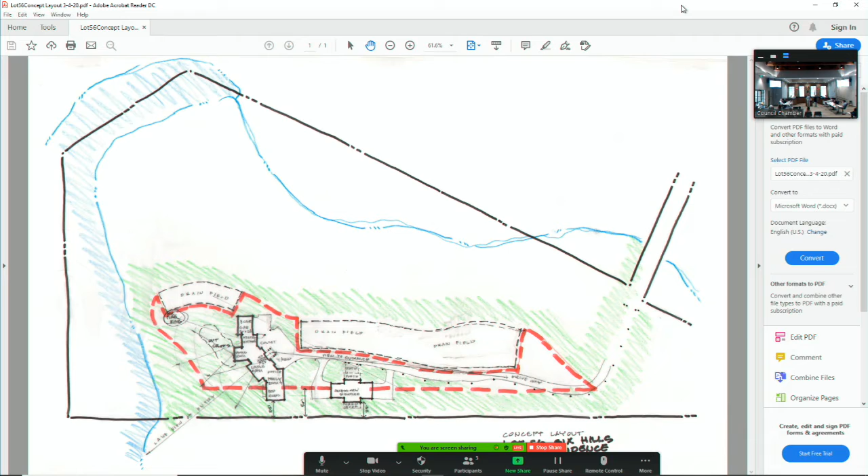Bob's here, and the one thing we discussed yesterday with Mr. Brubaker, my neighbor, there's been a longstanding friendship. We've come to an agreement on the buffer, and we're totally fine moving forward with just the one-sided buffer. But I wanted to show what we were able to show Bob yesterday: by not getting the variance, the house gets moved over into where the septic area is, which moves the septic field up to where the property line is. We'd have to cut into a whole series of trees, and the secondary structure ends up where the driveway is, so we'd be cutting a new driveway, more than likely up towards the property. So I think Bob agrees there's probably more damage to be done if we don't have the variance.

We've come to the agreement that the remaining 25 will be untouched in a perpetual easement. So if for some reason we aren't the owners long term, that's protected for Bob—that 25 will not be built on or touched, and those trees will continue to be maintained as a forest. Just wanted to show that, since we don't have the picture, at least you can see there's a lot of thought put into this. There's actually some photos of the locations.

Those photos in the packet show what it would look like without the setback and with the setback. The little blue line shows where the driveway would be centered, right where the current drive cut is, and right where the secondary structure would be without the variance. That would cause major disruption—additional cutting, additional property impact, and more than likely the septic field would have to be moved into the most dense area of the property.

Mr. Brubaker is here, and he'll have an opportunity to speak and share his concerns as well. That's it for us. Any questions for us? Are there any questions for the applicant?

Where does Mr. Brubaker live? The only really adjacent home nearby is Mr. Brubaker's property. It runs along the rear, backside of the property—Bob's property and ours adjoin at the lake and run across that back. I think it's considered the west side of the property, adjacent to where the west accessory structure is, right on that line. That would be the Brubaker property. One picture, I'm assuming, because his name is up here—yes, that's his lot.

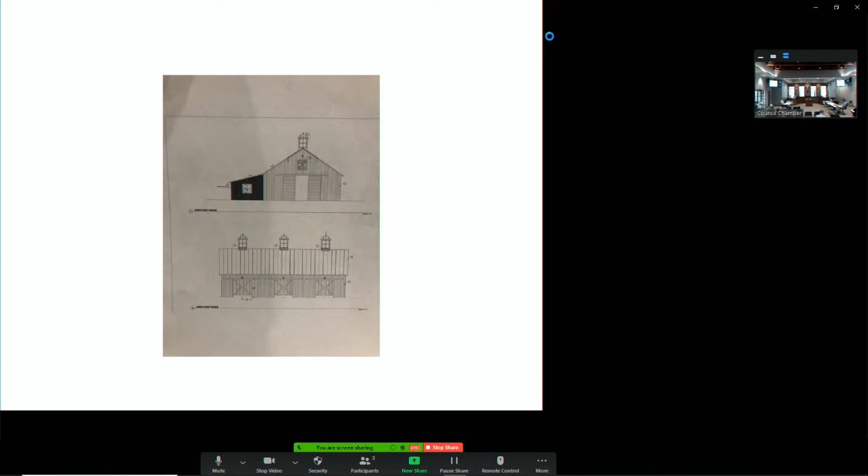I have a couple of questions. I'm not sure, I guess they're showing a proposed house. I just wanted to make sure that the permit was issued for it. I think you said it was, but I just wanted to confirm. For the land disturbance permit, yes, and for the house, yes. I just wanted to make sure that was clear, that there is one.

Because on cases like this, with accessory structures located in the front yards, we wanted to make sure, and the board's always asked that the accessory structure be subordinate to the main structure. So a 7,200 square foot building, it's up to the board to determine if that's subordinate. So that was one of my questions. The building permit for the home equals what square footage? I believe it was roughly around 10,000 square feet. Okay, so this says 11,000. I'm sorry, 11,091 on the site plan. Thank you for clarifying.

Any other comments, Bob? Well, I wasn't sure, maybe during the presentation, the 11,000 — is that like a two-story, so it's really 6,000 and 6,000 footprint? I just don't know because the accessory structure, the board's always said, Bob, make sure that when it comes in to describe it so you'll know whether or not it's subordinate size-wise. Well, I think we could look at the footprint of the home relative to the 7,200 square foot pad and see that the pad is subordinate to the home. Yeah, in footprint. And I'm sure the applicant will clarify.

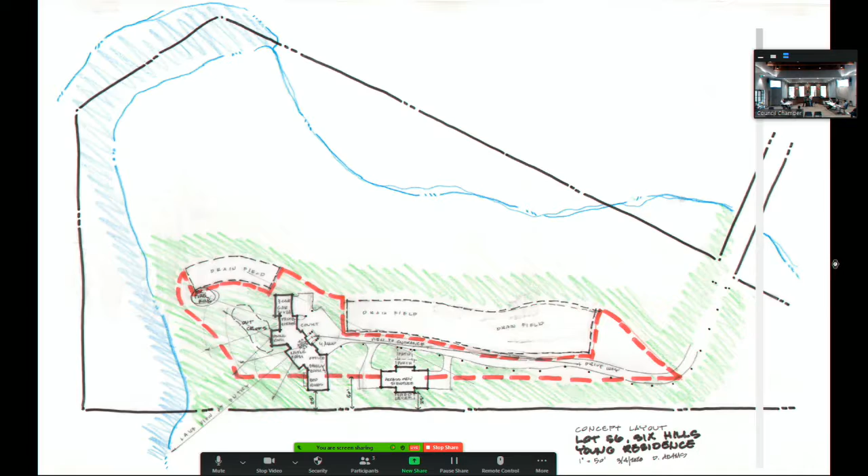So we're incorporating the existing structure. I would like, if possible, to have the original survey showing the original conditions placed on the screen, but it's not loading yet, so I'm okay waiting a minute to get it up there.

I think it's important for people to see this is a 30-plus acre parcel. There was an existing house from 40 years ago with outbuildings, and we went through the application for demolition of the existing house and the old rundown barns. I just wanted to demonstrate that.

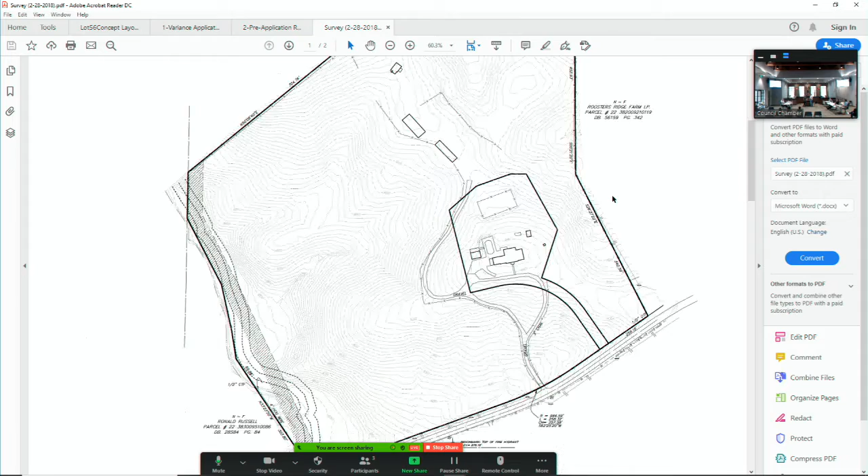Does the overhead projector work? Okay, go to the survey right there. Go up one—maybe it's there. Oh, maybe that's it, thank you. So this was the state of the property when the Young family purchased it. That's 7,200 square feet, and it was formerly a tennis court. So to repurpose that area that's already cleared and graded was the intent.

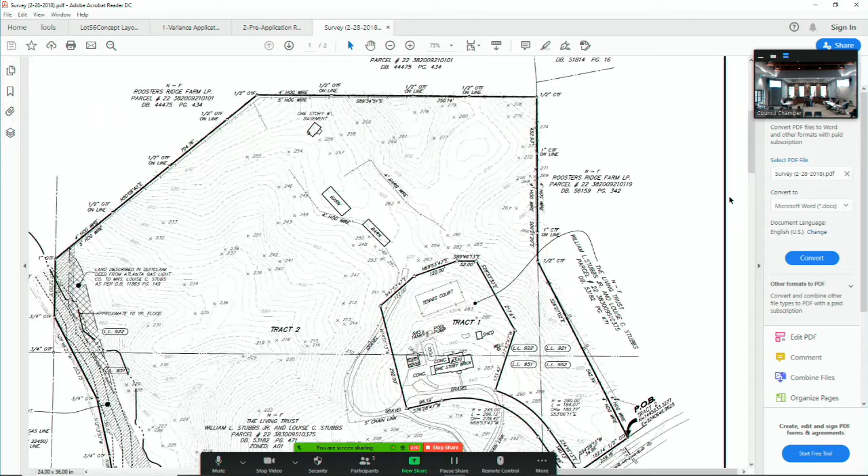If you see where the two old livestock barns are toward the rear of the property, that's roughly where, as we'll see on the site plan, the new residence under construction is located. The building to the west of the one-story brick house is the structure—I think it's misidentified as a guest house. It doesn't have a restroom; it never was a guest house. But anyway, that is the structure we're wanting to keep.

So I think this gives you an idea of the conditions prior to their purchase, and why—the existing driveways, the existing graded areas, the existing tree removal that was there. So if I could get a copy of the site plan.

While he's pulling that up, how many structures have you already demoed with approval on the property? Three or four? Three, yeah. Where was the original house? Ma'am, that was what we just had up on the screen, next to the quote 'guest house.' Do you want us to go back to the survey?

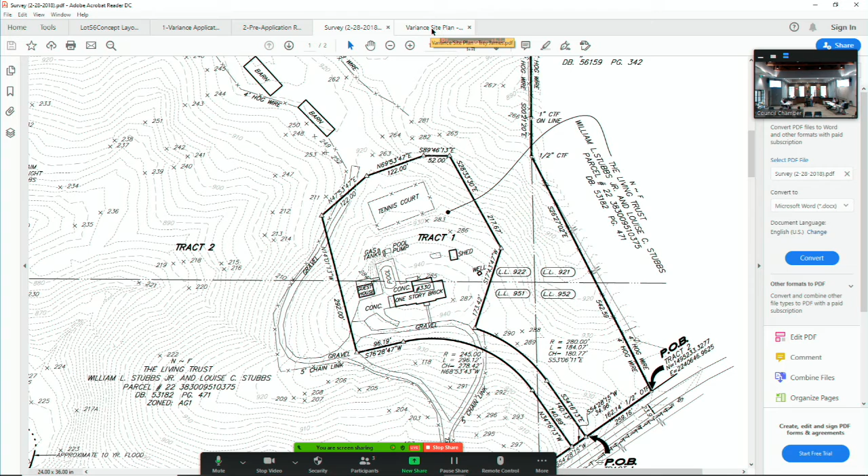Okay, so originally the structure was in the backyard that you now want in the front yard? Well, it was not behind—it was to the side. There it is right there, Ms. Keller. Okay, so the one-story brick building was the primary residence, and over to the west, the rectangle is the structure. So it was technically behind the front building line.

And the tennis court that now is going to be another—yes, there will be the barn, the workshop and the equipment storage. Okay, so if we could have the site plan.

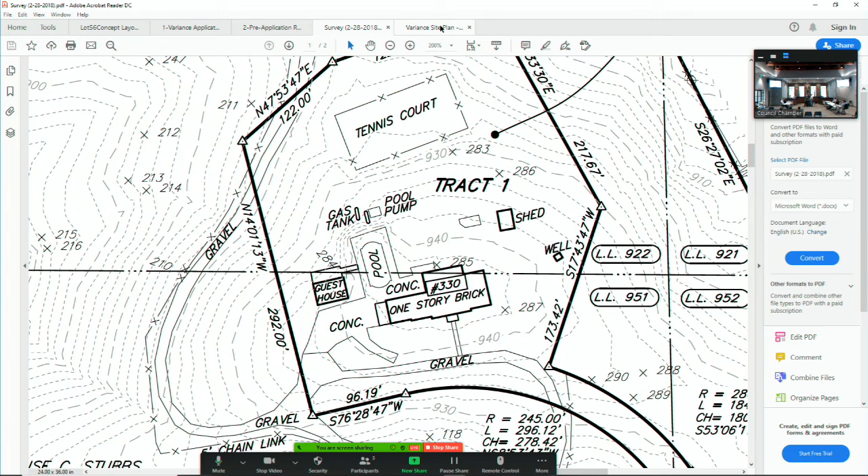So you'll see in the northern quadrant the proposed residence that's now under construction, the existing pad that was formerly a tennis court which will be the site of the proposed building, and then the existing building that's there. And I'd like you to note the distances from Dorris Road and the fact that they're so far away.

What is Exhibit A, which is the former guest house and the tennis court—what is the distance from the road? I'm going to have to guess: that sideline is 542 feet there, so I'd say 450 feet on the proposed barn and 400 on the existing structure. Okay, according to Google Earth it was 500 feet and 600 feet from Dorris Road. Yeah, that's because the road is bowing out if you did a perpendicular distance.

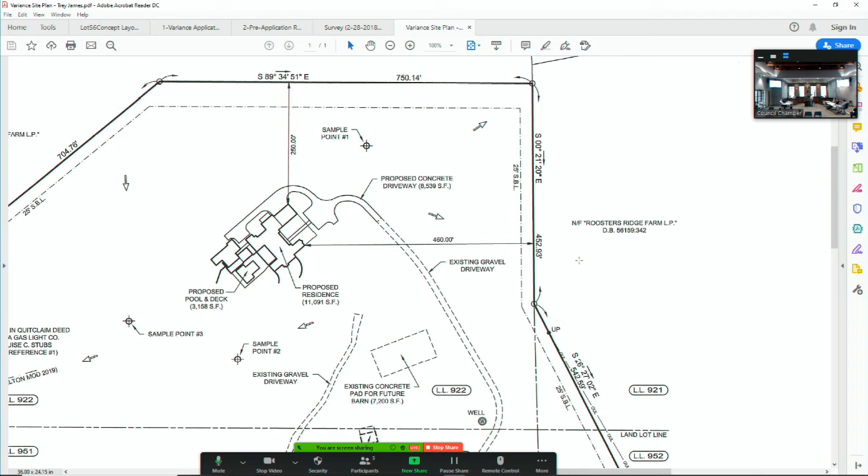And so could we have the pictures, please? Okay, so this is the existing structure. As you know, this was an abandoned residence, so this is the shape it was in. They're proposing to remove the blue awning, repaint, and refurbish it—not remodel, just refurbish. So the blue awning is going. If we could scroll to the next picture—it will be newly painted and refurbished, but not remodeled. Okay, if we could go to the next pictures.

On the top? Well, that's just the Google, but there should be. He's got them there. Yeah.

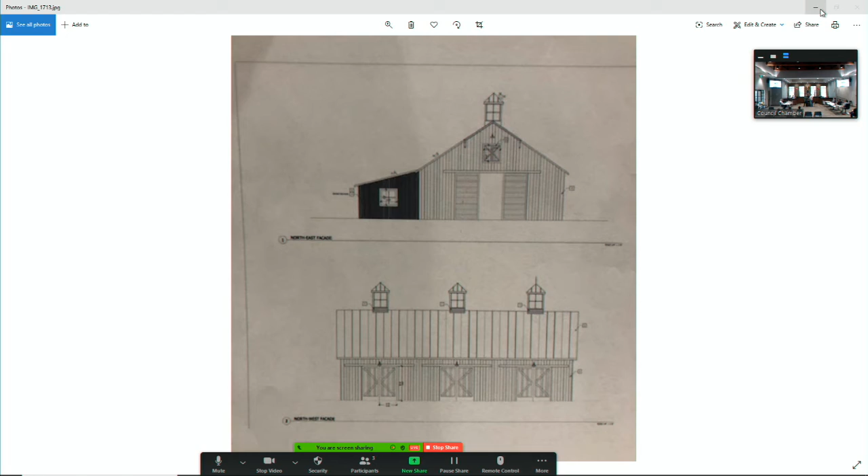So I know I've bounced around a little bit. It's a little new for me tonight, a little different. We would be glad to try to entertain any questions you might have. Mr. James can articulate his building foresight more than I can on that particular thing. But anything else we can go over, I mean, the site plan is specific. It's not concept on locations, and we would be fine with making it a part of the record.

Okay, thank you. I have two questions. The intended use of the 7,200 square foot pad, the intended use of that barn would be? So we have, as Scott mentioned, farm equipment, so tractors, side-by-sides, and that kind of stuff. So not livestock? No livestock in that building, no. Potentially a wood shop, like just a small workshop. No living quarters?

No living quarters at all. My second question was in regards to the existing structure in terms of a facelift, not a remodel. What are your intentions in terms of making improvements to that?

I'm a little offended by the pictures up there because a lot has happened to clean that up since. We just want to put new siding on it and use it as we're using it today, which is storage for fertilizer, seeds, and that kind of stuff. The roof is okay as far as I know, I'm not an expert there, but if we need to replace the roof we would do that. The siding is just worn because it sat vacant for a long time.

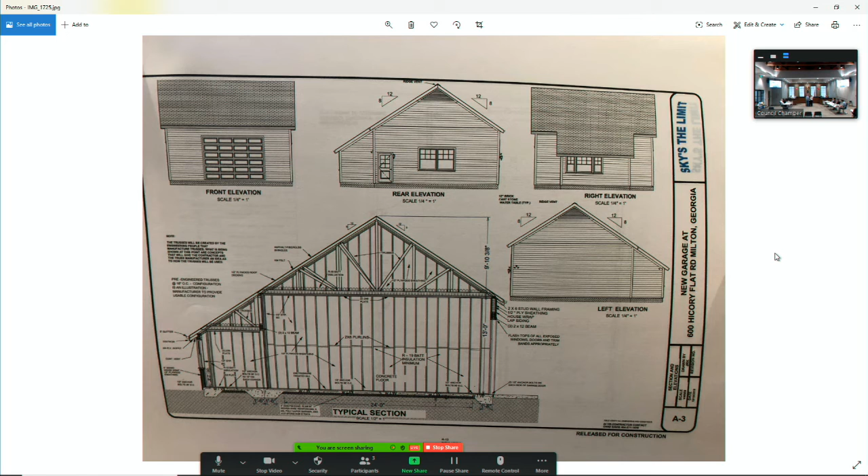Sounds like someone's spoken to you about that. We share everyone's concern, we want to have the least impact as possible. Okay, any other questions for the applicant?

Mr. Kurt? Yeah, on this, we have it as Exhibit C, this little picture of what the proposed garage is going to look like. Yes, that's correct, if everybody's with me.

Is that orientation flipped around? What I'm getting at is what you would see from the road is the side of that garage. Is there any intent if you can see it? Oh, that's correct, the orientation would be the side of the garage from the road.

At this point, you don't think it can be seen, or possibly? I think you might be able to see the very top of it, but you're not going to see the full face of that side, we don't believe.

Okay, I guess my question was whether there's any thought in terms of making that side of the garage more visually attractive, since that's the side that faces the road, which is what this all comes about in terms of having a building that's in front of the house. Maybe in your discussions with the architect, you could look at making that better. I'll help you with that.

So I'm going to ask the city architect to speak. Whatever we approve here will be subject to architect review by the city architect. So with that, Bob, can you comment? This is the homeowner presenting it a little bit differently, right? Yes, some considerations that you may face.

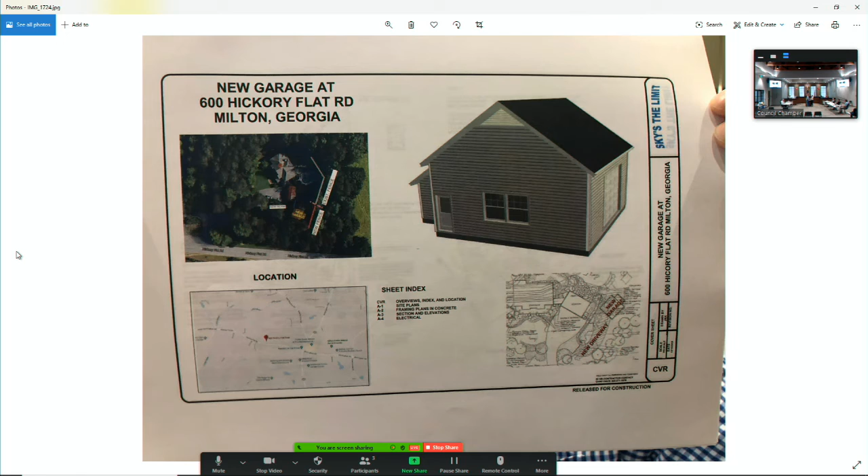Generally when we get an accessory structure that's this close to the street, whether it's visual or not, whether you put landscaping or not, we do want the building to have much more design elements to it, more barn style, windows facing the street, and more of an architectural character to the building.

So it's something I'd have to sit with you all and go through, but it wouldn't be exactly what you have here. This is very simple. It'd have to have a lot more Milton character to it. Well, be careful when you say a lot more. It'd have to have character, more character.

We'd be concerned about a solid garage door facing the street. We don't want it to be just a plain garage door. It could have a couple windows, like a carriage-style door, some barn-style door to it.

And on the side, same thing, the materials and the style of it should be consistent with the look of it. We appreciate that our plans will need to be finalized, and we're good with recommendations and requirements that place it in a more attractive way, which just needs to fit in with the overall aesthetics.

But we appreciate what you're saying. Adding windows, we're glad to do it. Generally it's going to be the door, the garage door, the windows, the siding, and just the character of it. But I can go through it with you and make it look a little bit more stylish.

We would like to keep it in style with the home, the original structure of the home. So we want to make sure we can keep that in, so it all flows together. Yeah, we'll work with you on that.

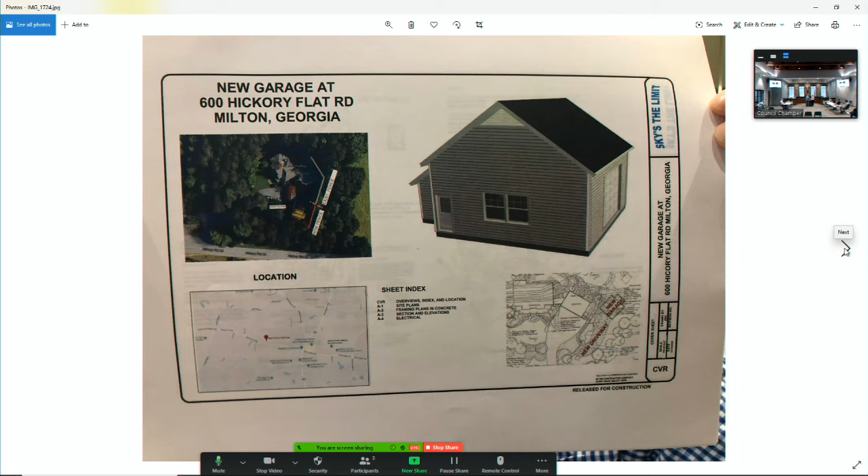Cody, do we have anyone available online that's interested in speaking? Not participating from Zoom, but you did ask me to check if there were approvals from the neighbors. We have one from Lauren Robertson located at 650 Hickory Flat Road, and another approval from David Morgan, though I did not get the address on that. So two approvals. The 650 address would be the 20 acres adjacent to the property. Yes, and the other one would be the adjoining neighbor, which is a flag lot behind. Correct.

So moving then to public comment, is there anyone here that wishes to speak in favor of this application? Please come forward, announce your name and address for the record. My name's Doug Fix.

I'm at 590 Hickory Flat Road. I'm essentially the house behind these folks from the road. For some reason my letter was not in your records — we gave an approval letter. They're very honorable neighbors, they believe in the integrity of Milton and also the development. I happened to help form the development in 1989, so we're ears up on anything that goes on there. And this meets our approval, and we wish them well with it.

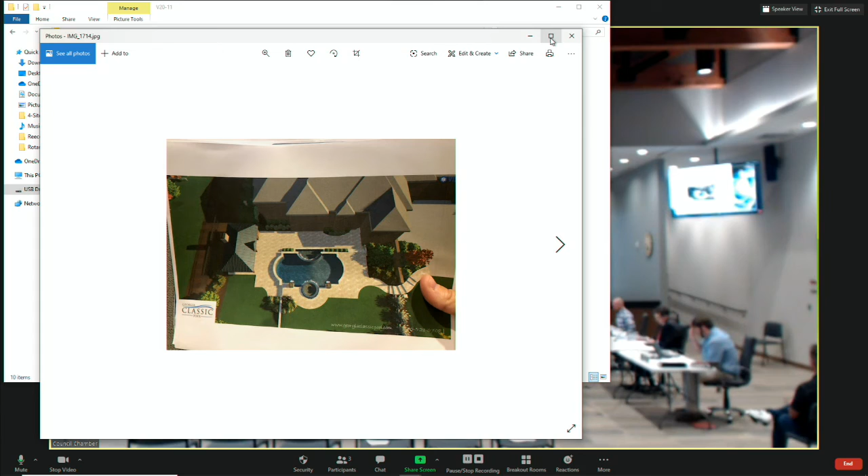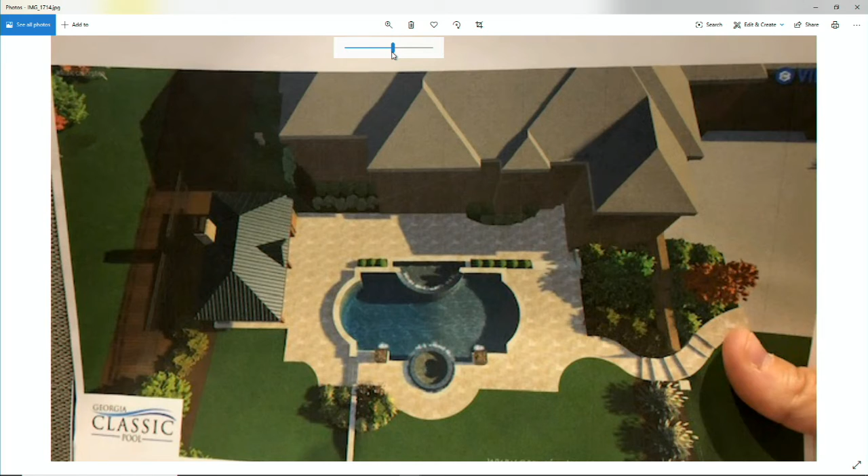The applicant is now proposing to construct an accessory structure, an open-air cabana, that will encroach into the side yard setback, Exhibit A. Section 64-416I states that accessory structures may be located in rear or side yards, but shall not be located within a minimum yard. Since the applicant is proposing to construct an accessory structure in the side yard setback, a variance is required. On June 2nd, 2020, the Design Review Board did not meet because of the lack of a quorum, therefore they have no comment.

Staff response: the applicant is proposing to construct an accessory structure that will encroach into the side yard setback, Exhibit A. The restriction of the drainage easement and the setbacks make the location of the accessory structure difficult to place. When the applicant proposed to construct the pool, a drainage easement on the western side of the property had to be relocated to make the pool not encroach. However, the location of the accessory structure can be located on the eastern side of the pool. Allowing the reduction of the side yard setback for an accessory structure will cause detriment to the public good. Public safety, health, and welfare will not be secured, and substantial justice will not be done for the surrounding properties. Staff recommends denial of this request.

Cody, can you please restate the ordinance that we're looking at a variance against? In this case, this is an accessory structure. It also includes a fireplace, and I just want to make sure we have clear guidance in regards to the location, allowable location per the ordinance. Just give me one quick second. Specifically, want a refresher on the fireplace locations.

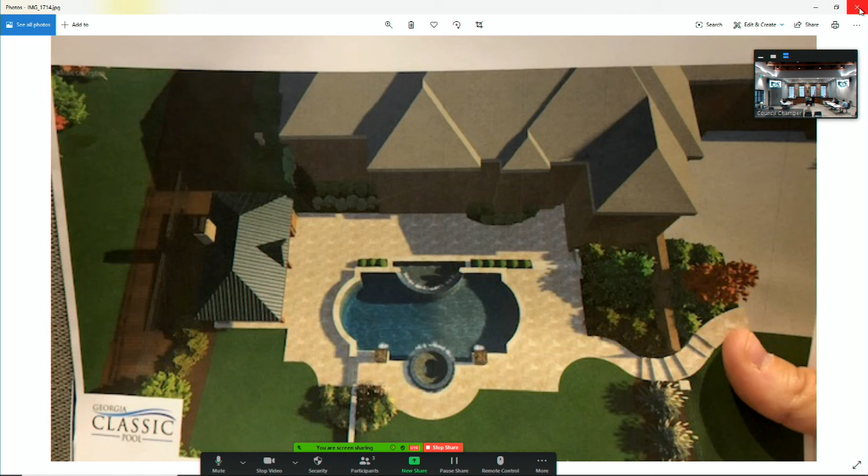I have some pictures, but there's the grade of the land there. The pool sits at the basement level. There is a large brick retaining wall that then goes up to the main level. You can kind of see it there. There might be a better view at ground level. But to fit a cabana in that space just didn't seem aesthetically appealing to squeeze it in that area. And the pitch and roof of the cabana would then be in plain view of the main house. They overlook the golf course, so there'd just be a cabana roof out their window. So this is their pool.

That east side, on the far side of the pool, is where the staff had suggested putting it, and that's where we just disagree as far as being a good placement. I'm not sure if there's another picture, but we're proposing it on this side. There are several pictures that would show why it would not work on the east side.